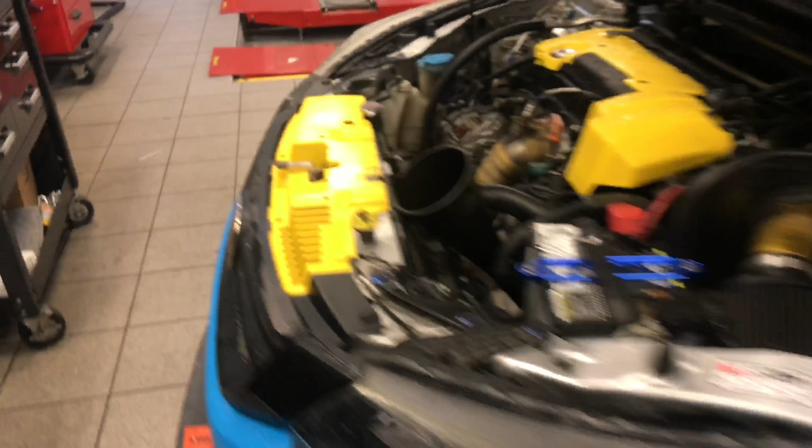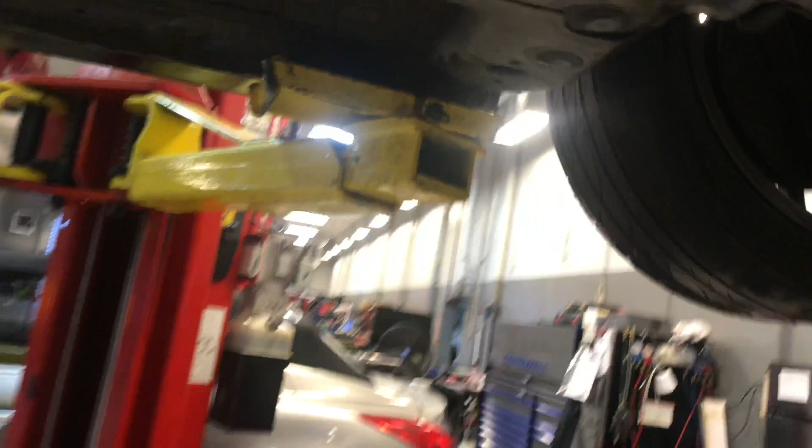Pop open your hood, make sure you have your hood prop on, and then what you're going to do is, sorry, I'm just a little ahead on it, I just thought I'd make a quick video. There's a plug that goes right there, and it looks something like that. So I put this plug right there, and raise it up. By the way, make sure to jack up your car from your proper jacking points.

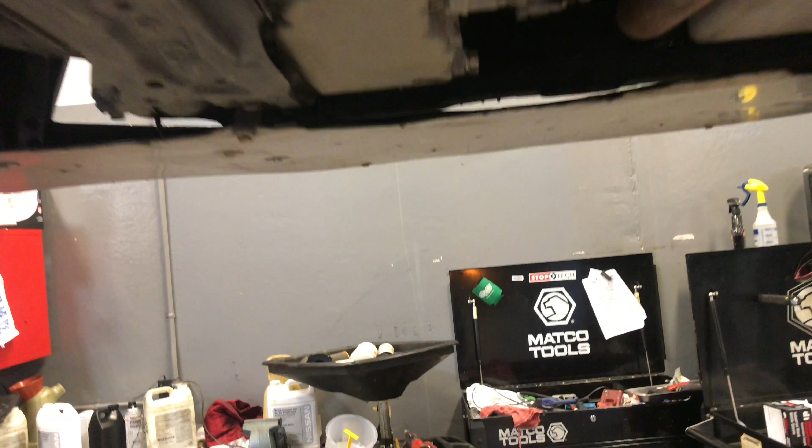Once you're underneath here, make sure you just inspect everything, make sure nothing is leaking. That just looks wet because I actually popped open the drain plug and let everything out. It's been raining a lot here in Texas, so what you're gonna do is come underneath, and you're gonna see a bolt that looks like it has a 3/8 thingy that you can put your ratchet on.

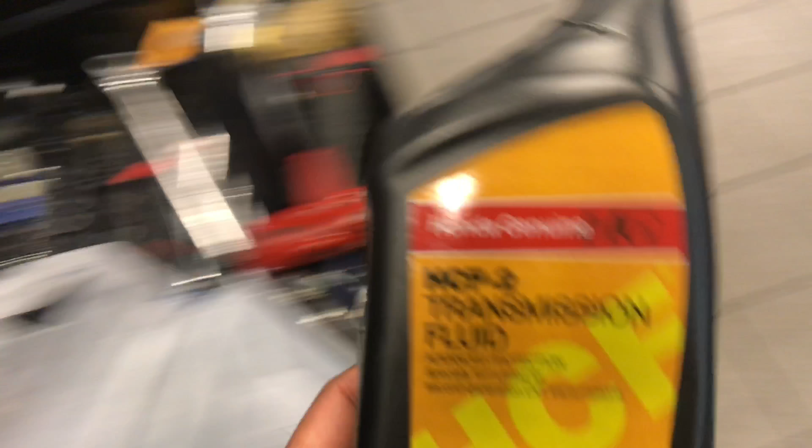Come over here, put it in there, and then you're gonna go to the right. You're gonna swing it out right, so it's gonna do something weird. You're gonna break it loose, let it all drain out, plug it up, and then you're just gonna bring it down. Right where we have that hole opened up, we're gonna put a funnel in there, and then, if I can find it, we're going to use Honda Genuine HCF2. You don't really want to use any kind of aftermarket transmission fluid on these, especially on Hondas, period, because they're really finicky about what they like and don't like.

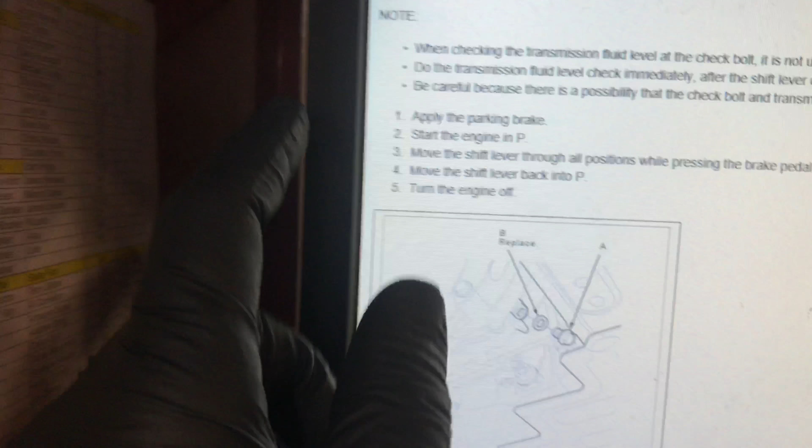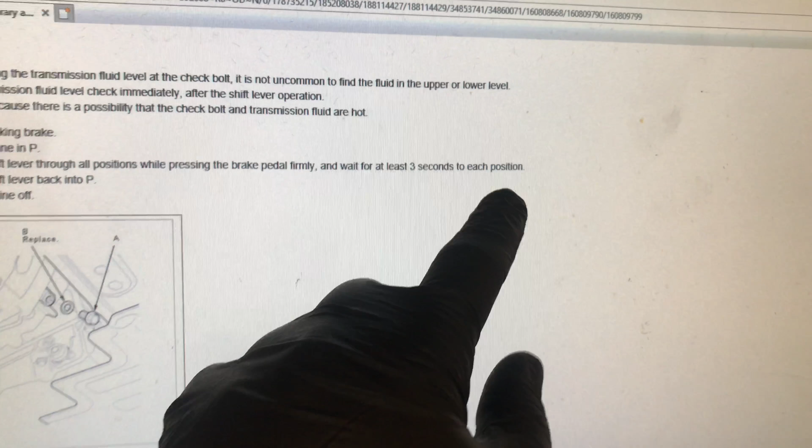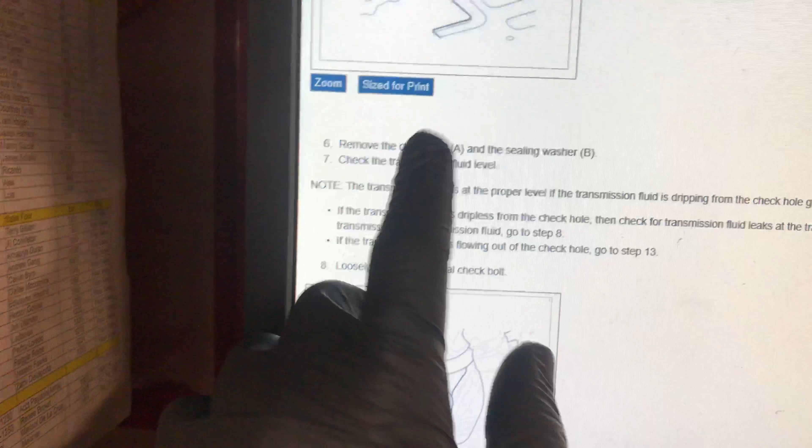Got some gloves on, and this is what you're going to do. You're going to apply the parking brake, start the car in park, move the shifter, blah blah blah. 3 seconds in each position. Put it back to park, turn off the car. Remove the check bolt, and I'll get to that real quick. So let's hop into the world's most uncomfortable car and turn this on. Pull this clear.

One, two, three. 1, 2, 3. 1, 2, 3. 1, 2, 3. 1, 2, 3.

Now on stuff like this, I like to just make sure everything's done properly. Yeah, you can do it just one and done, but I'm going to make sure everything goes through the valve body and the whole entire transmission. So I'm going to redo that again. I really recommend doing it 2-3 times just to make sure. Once I get that done, we'll be stepping right back out, and then we'll show you how to adjust it. Put 3 quarts or 4 quarts in here? Yeah, 4.

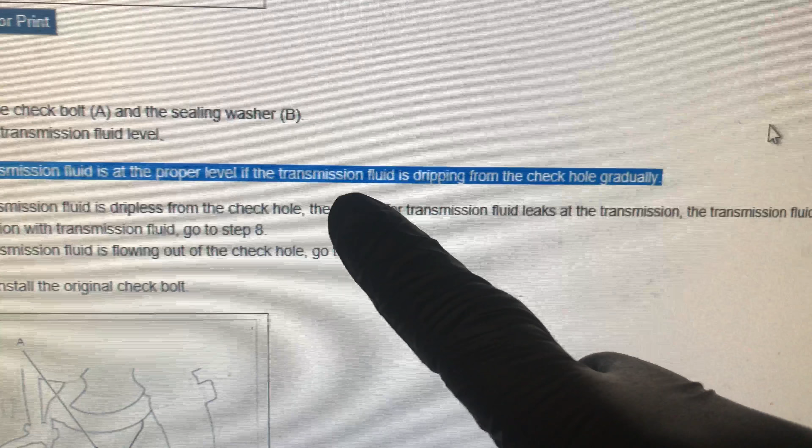Oh yeah, who knew that I had Brembos off of an Acura TL Type S that I can use still an Acura TLS rotor and Acura TLS pads just to make life easier. Who would have thunk?

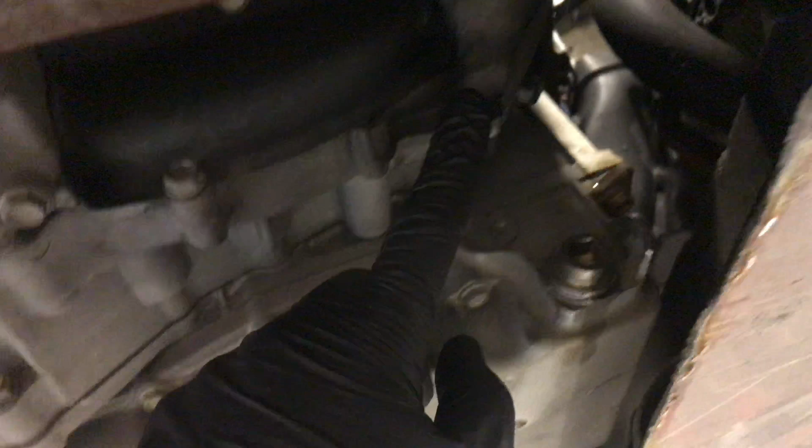I want to say it's 12. Get up here. There's a check bolt up there. That little guy. Get the focus. That one. So that's your check bolt. That's your drain plug, check bolt, drain plug, check bolt, and it's being weird. It's a 12 millimeter. We're just gonna crack it loose.

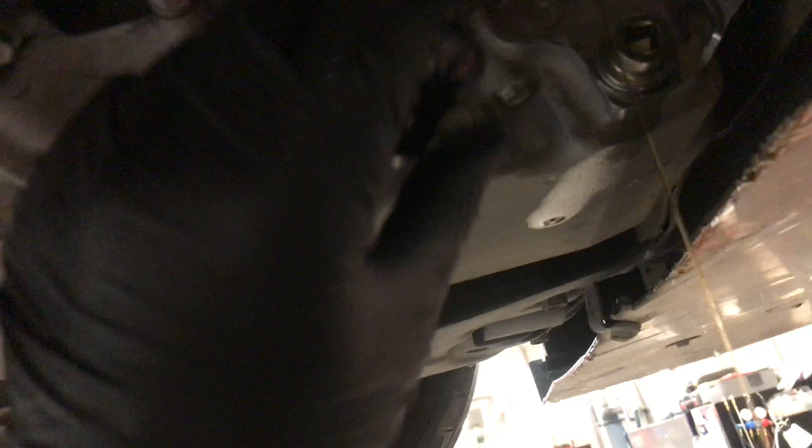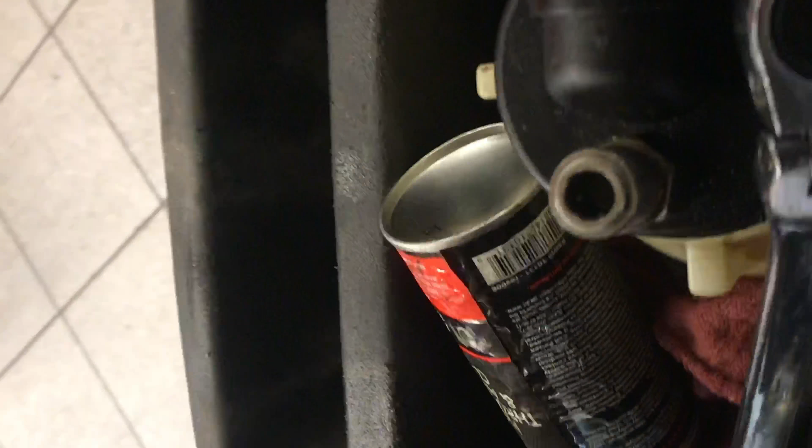Get this up. Put it right about where it needs to be. And then take this out. Stream's gone tiny now, so we're just gonna put this back in. That's hot. Make sure to not put your hand on your exhaust pipe. It just makes one heck of a day. Grab your 12 again, turn it to the other side. From lefty loosey to righty tighty. Cool. Remember, clean your splitter off because it grabs everything. And you're done after that.